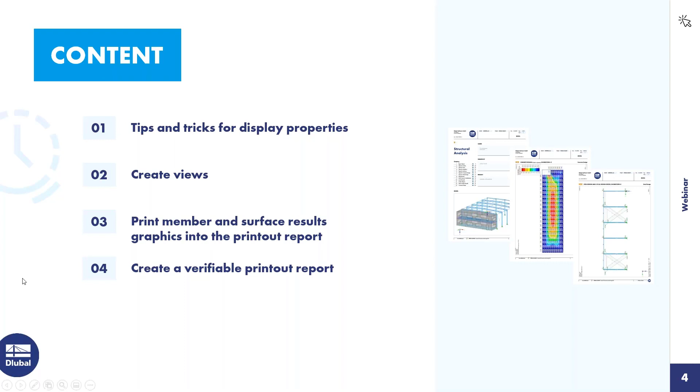Okay, then we turn to the program. That's the model of today's webinar. There are members of steel and surfaces of concrete. I designed the steel structure and that slab here. But before I start, I would like to introduce something - I would like to show you the loads.

So without results - the self-weight load case with the roof loads and the loads on the slabs, then the imposed load with the loads on the slab, and the snow load case. For the snow load, I use the snow load wizard.

I can display it by right click on the load, not separately. That's the load from the snow load wizard. If there are members below, then the program creates member loads automatically, and you can see that in that setting. The same is valid for the wind load case, wind in X direction.

I can display it also separately. Here are member loads and on this side, surface loads - so wind in X and wind in Y direction. I created only two wind load cases in this example.

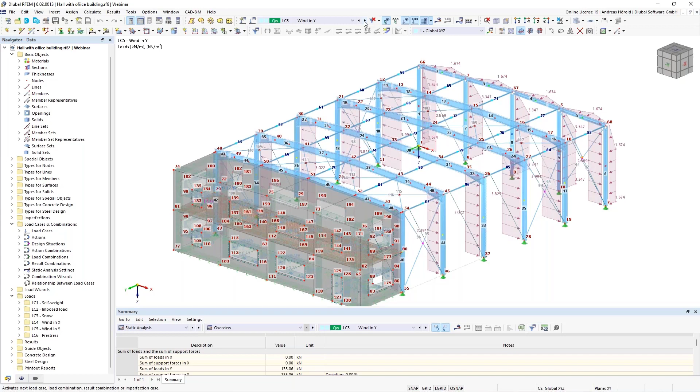And the last load case is the pre-stress. And we've got also imperfection cases, so in X direction and Y direction. Okay, that's all to the loads.

Then here on the left in the navigator data, I right click to open that dialog - load cases and combinations. I go through this dialog very quickly. In 2 weeks, I will present a webinar that contains the load cases and combinations dialog, only describing these dialogues.

I used for the combinations the Eurocode 0. Now you can see here different standards, international standards. And for the Eurocode, there are a lot of national annexes implemented. I use the German national annex.

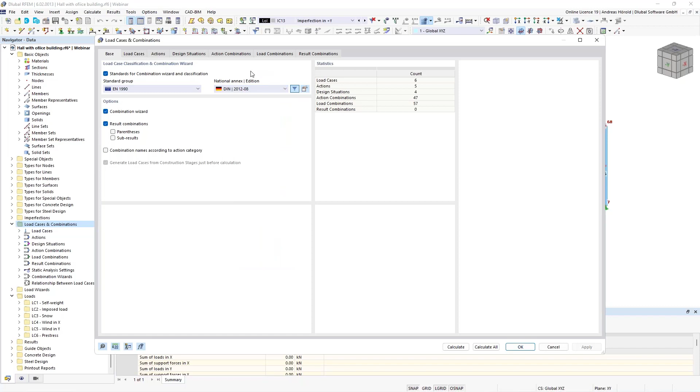Okay, then the load cases - the 6 load cases that I introduced at the beginning, the actions, for example the wind action - there are the two wind load cases assigned, and they act alternatively.

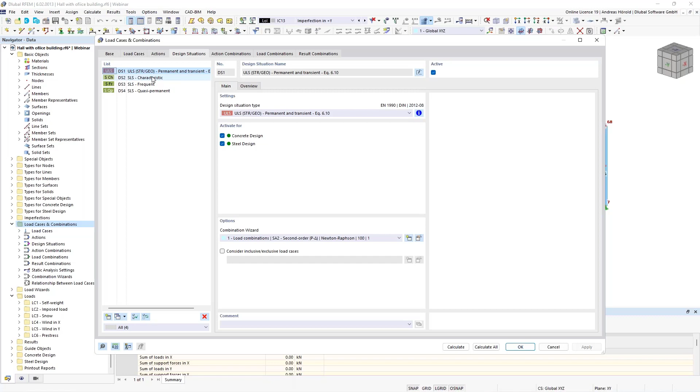So then the design situations - design situation number 1, it's used for the concrete design and steel design. It is for the ultimate limit state design.

Then design situation 2 for the serviceability limit state design, characteristic. It's activated for the concrete design and steel design, and these 2 design situations for the serviceability limit state design are activated only for concrete design.

So if you click on overview, you can see which load combinations are assigned. I can click through them. Okay, and here in this dialog, you can see all 57 load combinations.

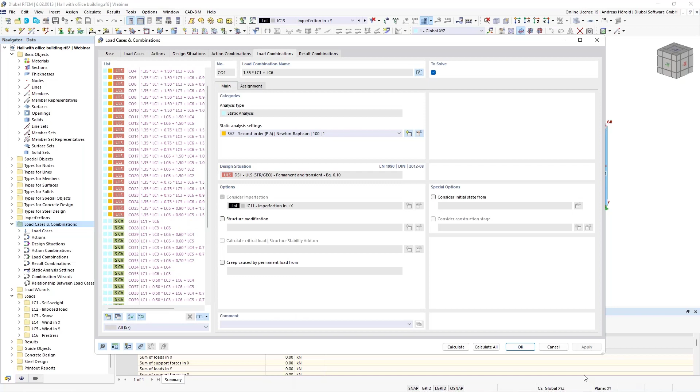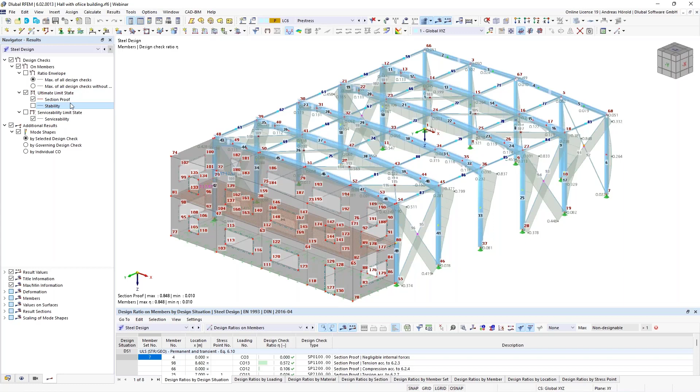Then I can click through these single designs here - the ultimate limit state section proof, stability, and serviceability limit state design.

Although they are displayed in different colors, you can see it's quite confusing. That's why we print not only the isometric view with the separate design checks. We create views in axis 1, axis 3, and axis A, with the multi-print feature.

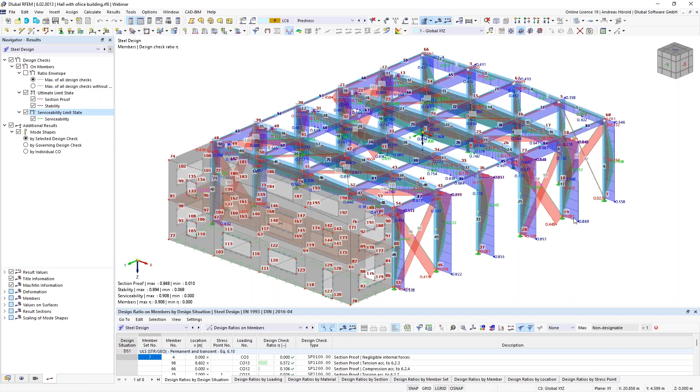Okay, I disable it. Then I show you the concrete design. I designed only this surface here, the slab. I can zoom in a little bit with the mouse wheel.

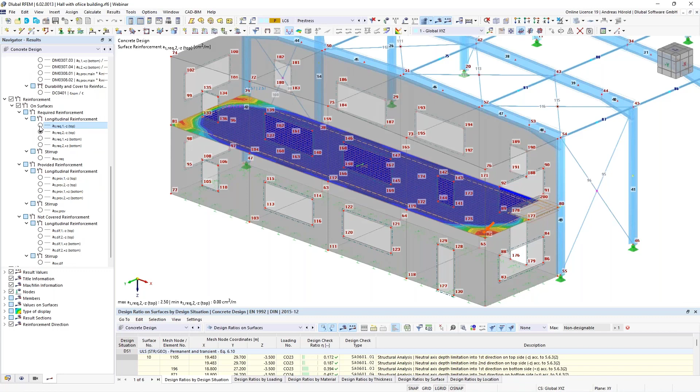So here in the navigator results, I can click through the required reinforcement, and I would like to print these four graphics in the printout report later with one step.

Then, parts list. We will also print a parts list in the printout report. I will come back to that later. That's a new feature in RFEM 6 and RSTAB 9.

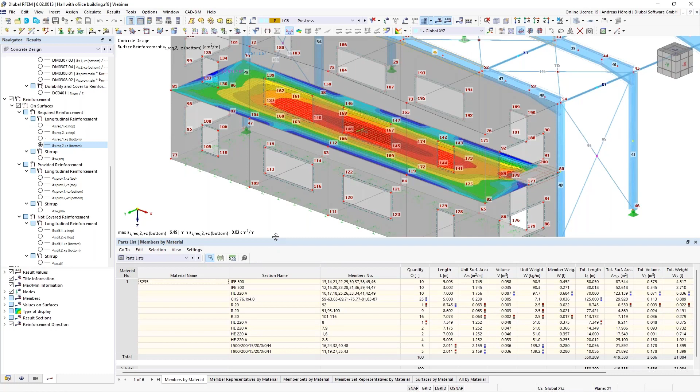So before we print anything, I define a line grid. Just a moment. Static analysis. So, line grid: left above in the menu, Insert, then Guide Objects, Line Grids.

Usually you define a line grid as a first step, not afterwards. I do it retroactively, and it's not a problem. You can do that anytime. I would add a label text.

Then here, line grid, I have to enter the distances in X direction, 4 times 5 meters. You can edit or change the labels here, but I'll leave it as it is for this webinar.

Then also 5 meters in Y direction, 5 times, and a short distance, that's the distance between the concrete and steel structure. That's all. I can apply it, and I'll see it in the preview.

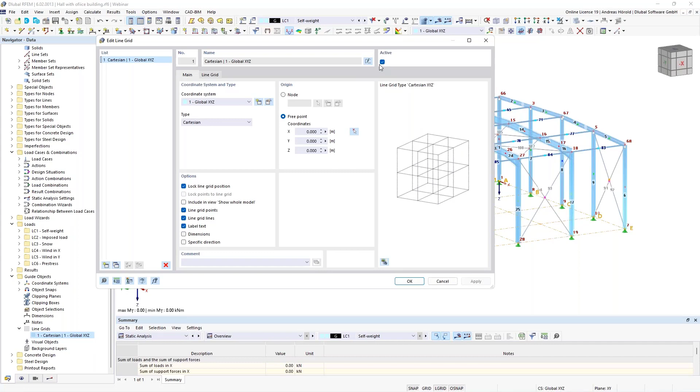If I would like to change anything in the display settings for the line grid, I can right click on it and open it. Just a moment, I load the white background.

So I can leave the dialog again. Right click, I show it again: Display Properties, and you get directly to the category here. A tip from my side: the categories in the display properties are similar to the categories in the navigator data and navigator display. If you want to find anything, you can right click on the object and find it here, and it's easier to find the object in the other navigators.

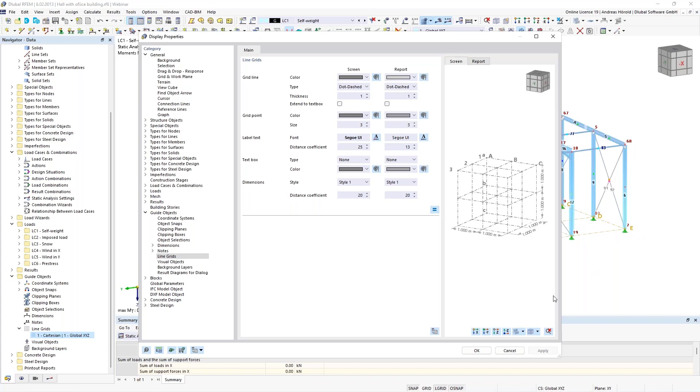Then I change the font to bold and size 12, and change the distance here. Just take a look at the text here. When I press Apply, it will be larger. So now the line grid is complete. I know where each axis is and can start with the views.

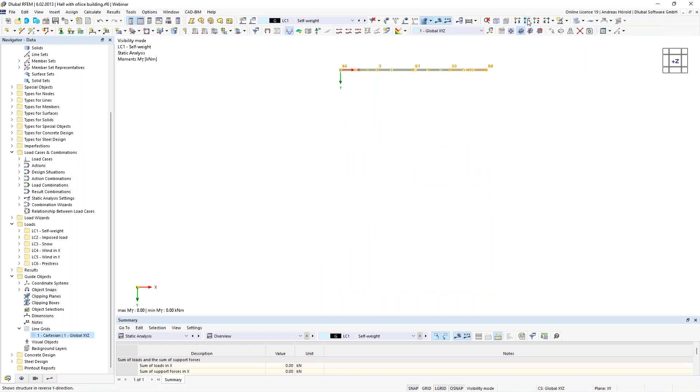Here, right above, I click on View in Z direction. Then I select all objects in axis 1, press Visibility by Selected and Related Objects, and change the view in -Y direction. Okay, and that's the view I would like to create.

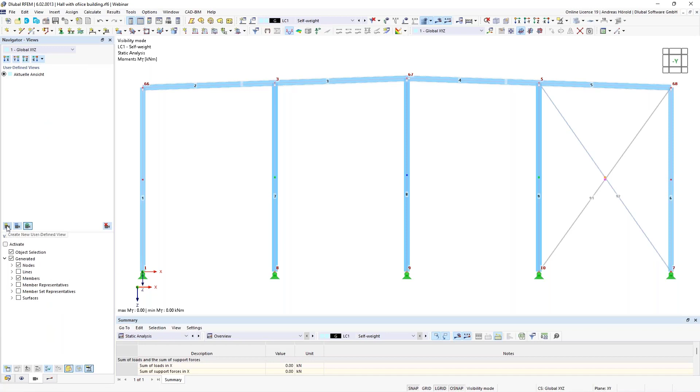So at the bottom on the left side, I change to the Navigator Views and create a new view with this button here. I call it axis 1. So that's the first view.

Right above, I click on Cancel Visibility Mode, change the view, select all objects in axis 3, then display only these objects, and change the view again. I can save the next view: axis 3.

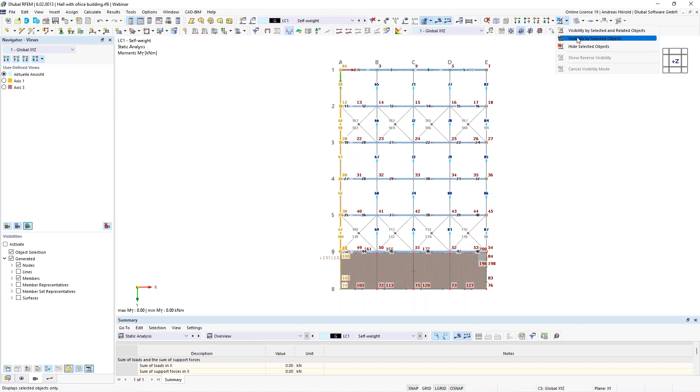Okay, then the same workflow again: all objects in axis A, then view in -X direction. I can zoom in a little bit. Now I can cut the concrete structure; it's not interesting for our results in the steel design. So, axis A.

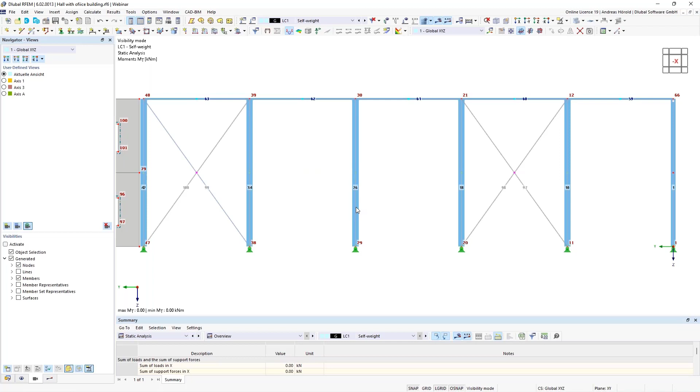So then I cancel the visibility mode again, and I select the concrete slab. Let display only this one. Change in Z direction. And I would like to create a view also for this slab.

As you see here, I created a surface reinforcement for the concrete design, a mesh Q257A. I would like to deactivate it, or not display it, so it doesn't disturb the displaying of the results. But I'm not sure where I can find it in the navigator display.

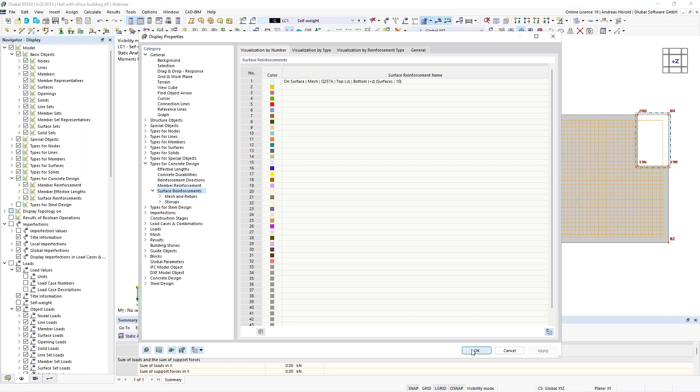That's why I apply the tip I gave you: right click, display properties. You can see in the category under types for concrete design, you can find the surface reinforcements. You could change the color here, but I don't want to change anything - I used it only to find the category for the navigator. Types for concrete design, surface reinforcement - I can deactivate it for the display.

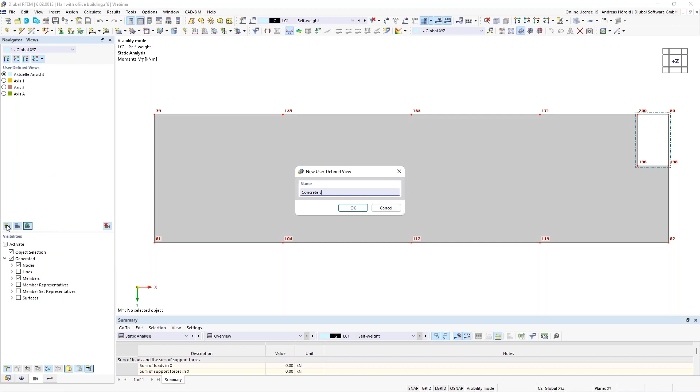Okay, then I create the next view - concrete slab. Now I recognize that the gray color here can maybe disturb the displaying of the results.

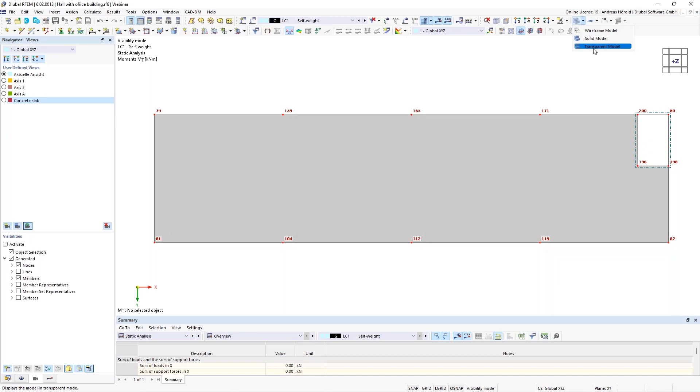I use the view transparent model and change to wireframe model. But now I have to update the view. How to do that? I unlock the views with this button here, then with the middle button I redefine according to current view. Then I lock all again, and then I can switch between different axes and see the view is updated.

So then all views are created. I cancel the visibility mode again and use the transparent model.

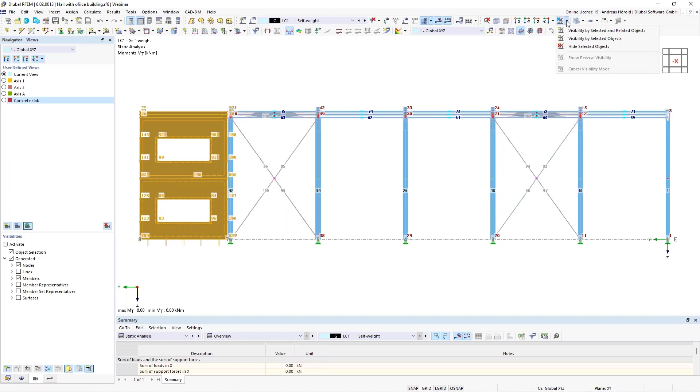For the isometric view that I want to print also in the printout report with the steel design graphics, the concrete structure maybe disturbs also the display. That's why I would like to deactivate it, or not display it. So I select all, and here right above I hide the selected objects.

Now it's not visible. Maybe we can display it but hidden. How to do that? I change to the navigator display, scroll a little bit down, and under the general settings you can show hidden objects in background. Okay, I like that more.

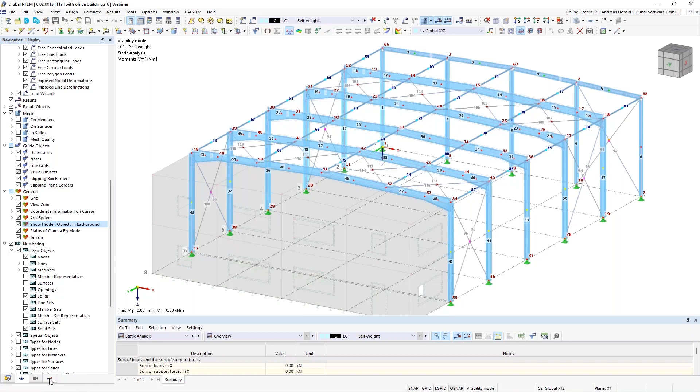So then in the next step we can print the steel results, so I can display them again. Okay, maybe I can rotate it a little bit.

I would like to print that view and the other views. So left above here, you can open that drop-down menu and select Print Graphics to Printout Report.

So then you can see a preview here. You can rotate the graphic - that would be 0. And if you want to rotate it in a clockwise direction, then for example 90 degrees, then you need to select this.

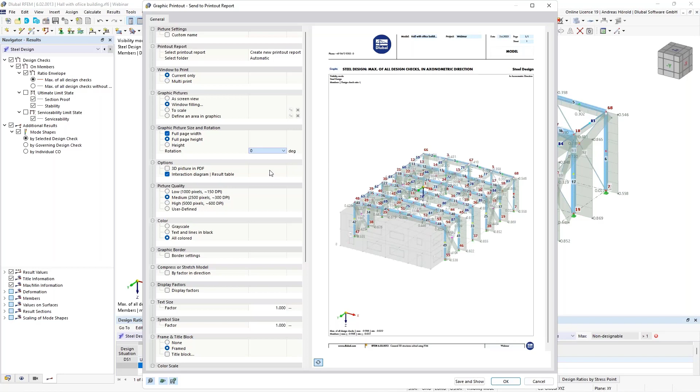But I would like to rotate it 90 degrees anti-clockwise, that's why I use 270. So you can use a screen view or window filling - it doesn't matter. And if you want to print only this graphic in the printout report, then press OK or save and show.

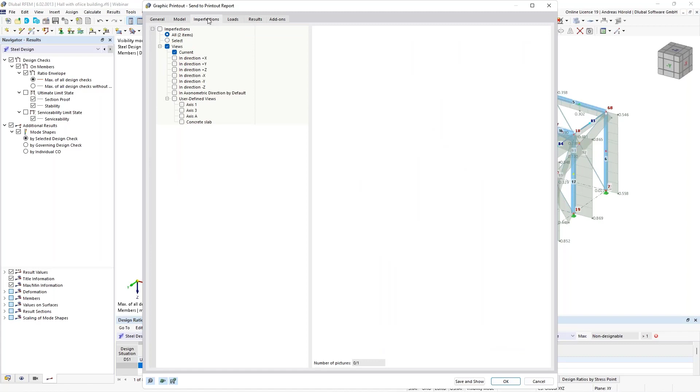That's quite easy, but I would like to use the multi-print feature. So I go through the single dialogues. I don't want to print the model, no imperfections, no loads, no results.

It's of course possible to print the member results, for example the internal forces, but I would like to print only the steel design results in this webinar. So the current view, that was the isometric view, then the saved axis. Then on the right side, I select the maximum of all design checks: the ultimate limit state, section proof, stability, and the serviceability limit state design.

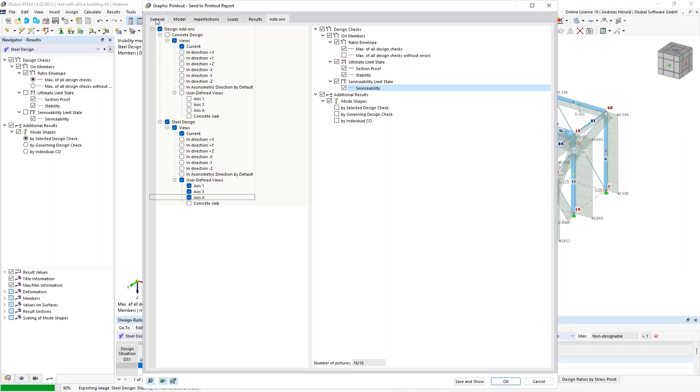At the bottom, you can see there are 16 pictures that are created in few seconds. I switch back to the general dialog, and all images are created. So that's the isometric view with the 4 design checks, then axis 1 with the 4 design checks.

Then axis 1 with the 4 design checks. You can see in the preview, it's quite good readable in the views. So this is axis 3, etc. Then I press save and show.

And we turn to the next dialog, printout report manager. Since we open the printout report for the first time, we have to select what we want to document. At the bottom left, you can load from a template - there are different templates already available, for example the input data and reduced results, that's the default setting, then concrete design, steel design, etc.

So I use the default setting. Of course you can save a template with this button here, save as template.

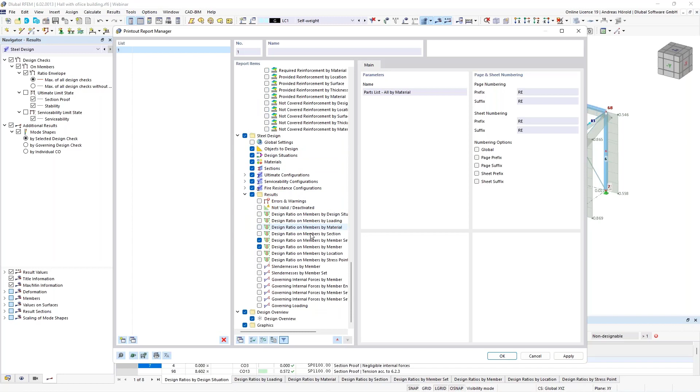Then parts list. Yeah, I select only this one and this one to show it later in the printout report. So then, for example, concrete design, where are the tables with the design ratio on surfaces selected, then the required reinforcement. For the steel design, the design ratio on members by member set and by members. Okay.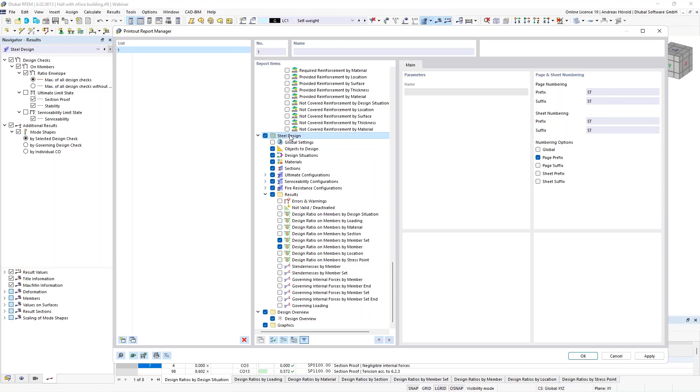So on the right side, you can select here, for example, page prefix, then prefixes will be added, for example, for the steel design, ST, or for the concrete design, CO, or for the model, MO. So, okay. Then the printout report is creating. So at the first time, it takes some seconds.

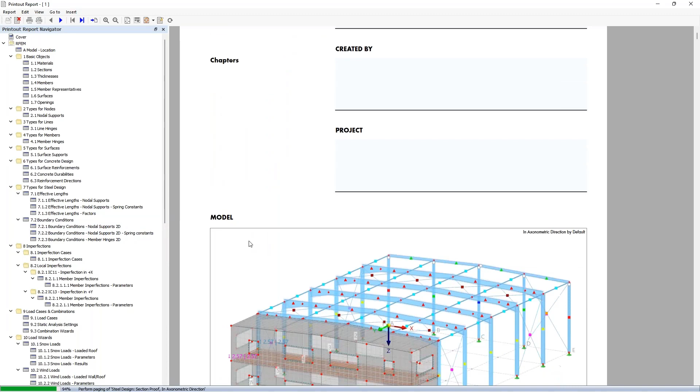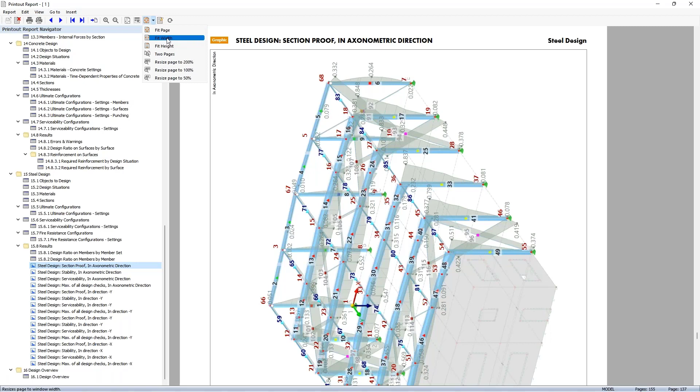Okay, that's the printout report. On the left side, you can see the content. And what's interesting to us in the first step are the graphics here. Above, you can switch between different displays, for example, fit page, fit width, fit height, and so on. 2 pages. I fit the pages. Okay, so the 4 graphics for the isometric view.

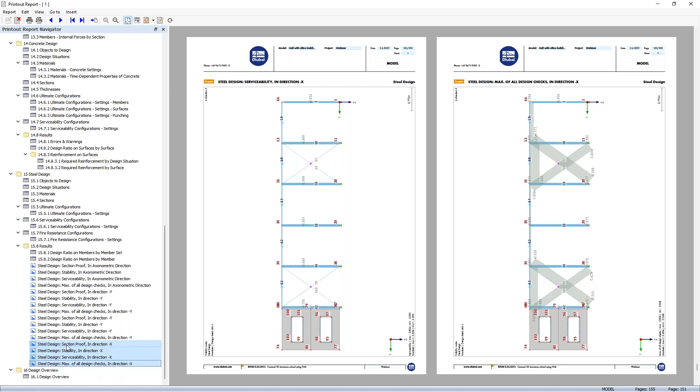So then axis 1, axis 3, and axis A. As you can see, the last 4 graphics are with the concrete structure, and yeah, I can modify that. With the Shift key, I can select all 4 graphics here on the left side. Then I do a right click, go to Properties, and select not window filling, but as screen view. And all 4 graphics will be updated in the next seconds.

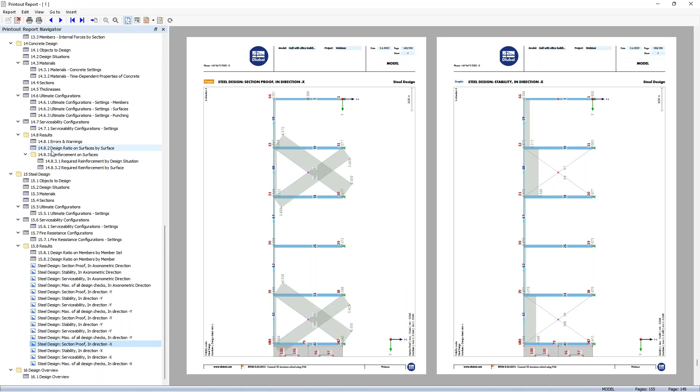So let's take a look. Okay, now the concrete structure is cut again. So then I would like to show the parts list. I fit the width. Parts list. Yeah, you can see in this table here the section name, then the length, the total length, and the sum of the length, then the total surface area. Yeah, for example, to calculate the coating or galvanizing, the total volume and the total weight. And you can also document the total weight by material here, steel and concrete.

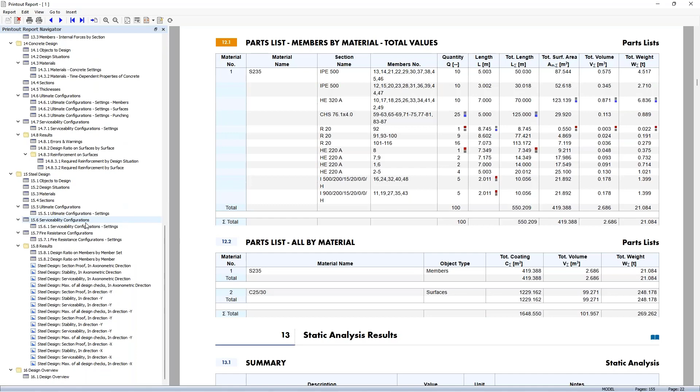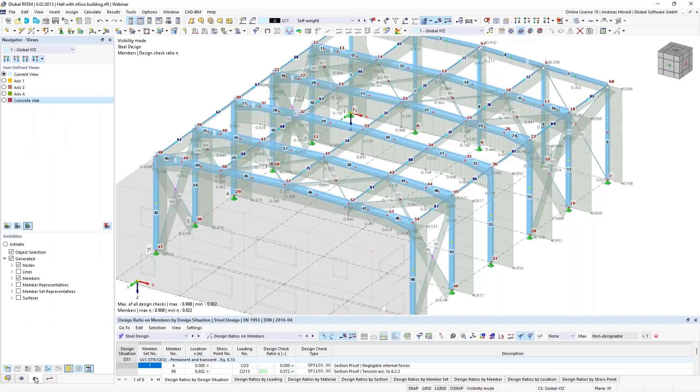Okay, then I moved the printout report a little bit on the other screen, and as you can see, I can work in the program and in the printout report in parallel. So I move it completely to my other screen. I would like to show you another feature. I select axis 3, and I would like to print the result diagram of this member set here, the horizontal beam. That's member set 3, and I would like to print it in the printout report.

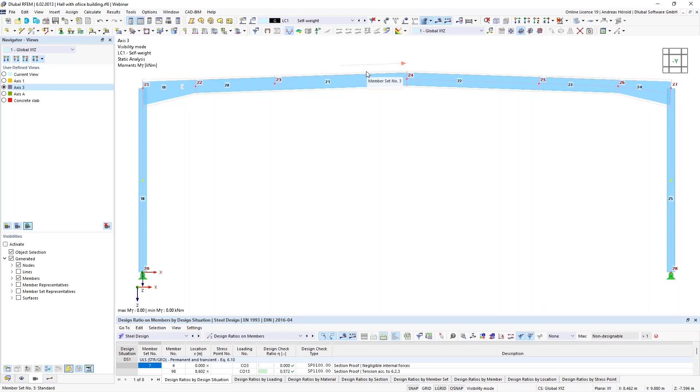Right click on the member set, then result diagrams. So then I have to select here, results on member set. That's okay, but not the self-weight load case, but the ultimate limit state design as design situation number 1, member set 3. Okay, I would like to document not the global deformations, but all internal forces. N, V, M. Okay, so 6 diagrams are displayed, and with that button above, or with the drop-down menu, print graphics to printout report, I can print that graphics.

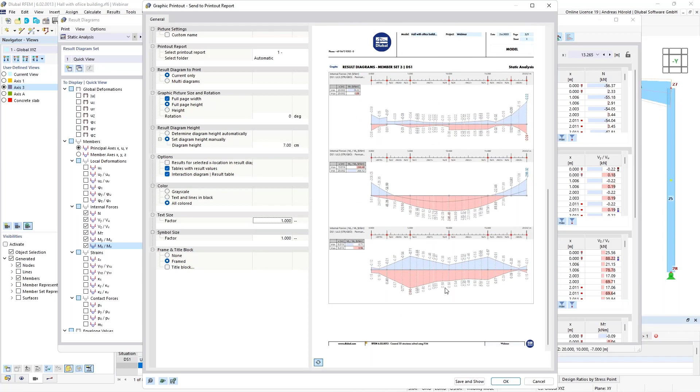So all graphics on one sheet at the moment. I can press here on the left side, determine diagram height automatically. And now it's much better. And you can also set the diagram height manually. I tested it before. 7 centimeters is also a good parameter. Okay, then save and show. You can leave the dialog, and we can take a look in the printout report.

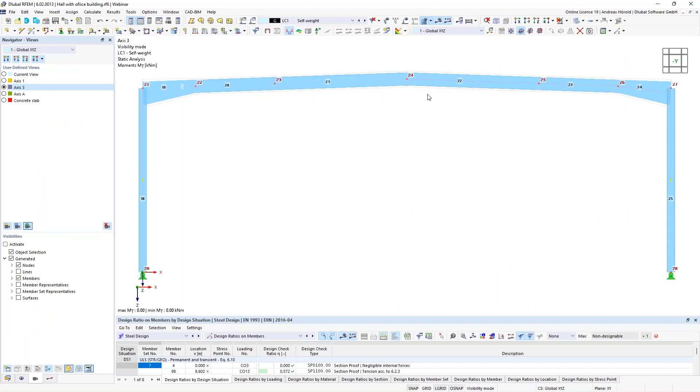Here is the result diagram. I fit the page, and you can see the 2 pages here. Okay, that's all for the steel design documentation. I continue with the concrete design. So that's why I go back to the program. So I use the view concrete slab. Let's display the concrete design results. Okay, then I change here left above to the navigator results.

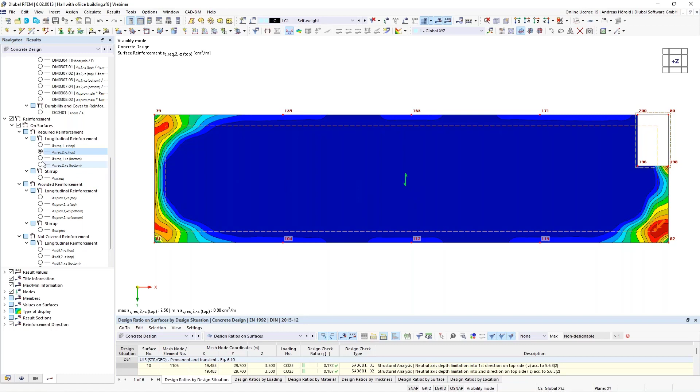And we can click through the single results, the two directions of the reinforcement on the top and at the bottom. You can see the direction of the reinforcement with that arrow here. Okay, and I would like to display the values as well. If you want to delete one decimal place, then you can go here left above to edit, then unit and decimal places.

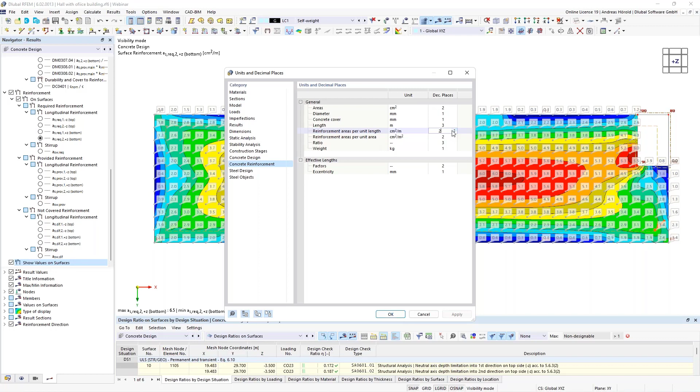And under concrete reinforcement, you can find the setting here, reinforcement areas per unit length. So, and if I change that and press apply, you can see in the preview there's only one decimal place now. Okay. I leave it as it is. Yeah, let's try it. Okay, then I print all again.

In the first step, I select the current view. Yeah, that's quite okay. The rotation is okay as well. Window filling, okay. And I select the multi-print. I would like to print all 4 graphics.

So, concrete design, the current view, and the 4 results for the required reinforcement. And I select also show values on surfaces. Here, 4 pictures will be created.

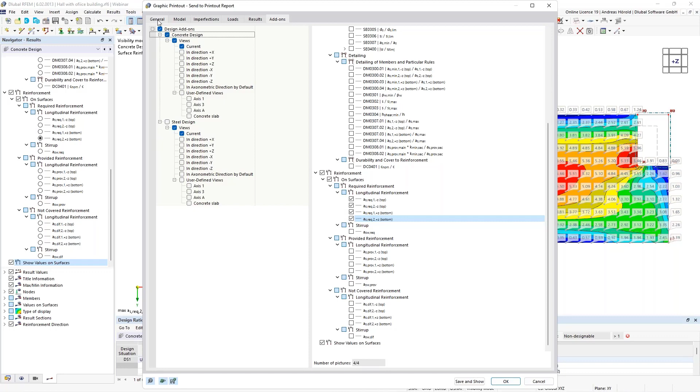We can scroll through the 4 images. Yeah, it looks quite good. Then we can press save and show and go back to the printout report. So, take some seconds. All is updating.

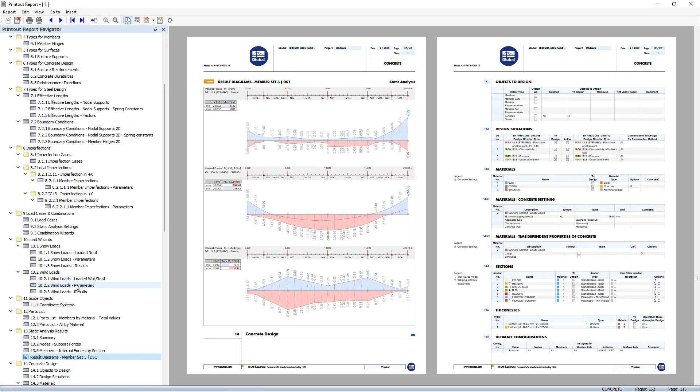So, now the 4 graphics are printed in the printout report. Yeah, I think that's quite easy. Just test it. And that's all for the steel and concrete design documentation. I will continue with general features of the printout report.

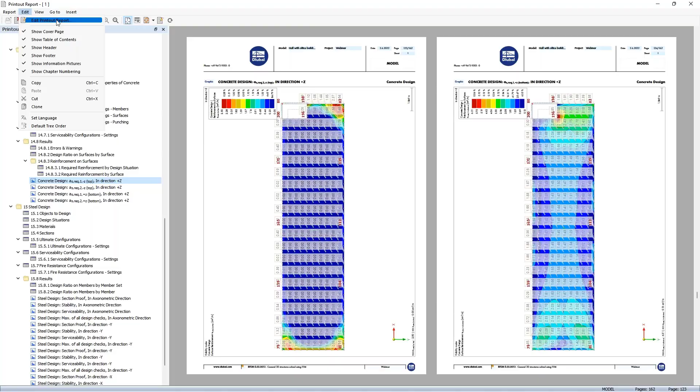So let's click through the menu. Here left above, the report. Yeah, close report, it's clear, and so on, delete. And at the end, we will export the finished printout report to a PDF. So edit, you can edit the printout report. It's the same button as here. You can add more topics if you want.

So I go back to the printout report here. So then you can use the copy, cut, and clone function. Shortcuts, Control and C are available, and so on. So you can set a language. You can translate the full printout report in another language.

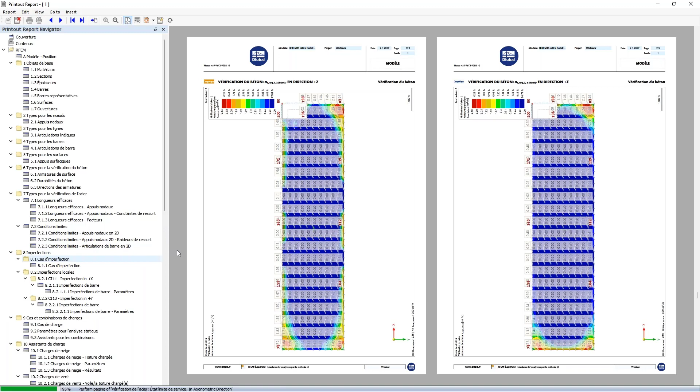I select French. There are 11 languages available in RFEM 6 and RSTAB 9, and it takes only a few seconds to translate such a printout report. Now we have got more than 150 pages, and you can see that it is already translated here. All is in French now.

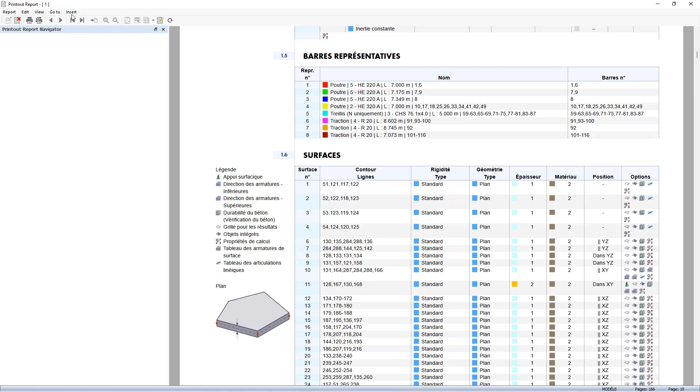I change it back to English. Okay. Then we have to wait some seconds. Go to, yeah, where are these buttons? You can switch between the different pages. You can open here, go to. I would use these buttons here, come to the end, to the beginning, to the next page, and so on.

And you can also click through the menu here, or the content, or navigator. So then insert, you can insert different things, images from file, an image from clipboard, then a plain text, rich text, HTML, then formulas, PDF. And I would like to insert a plain text and a PDF. The workflow is similar for all. So I start with a plain text.

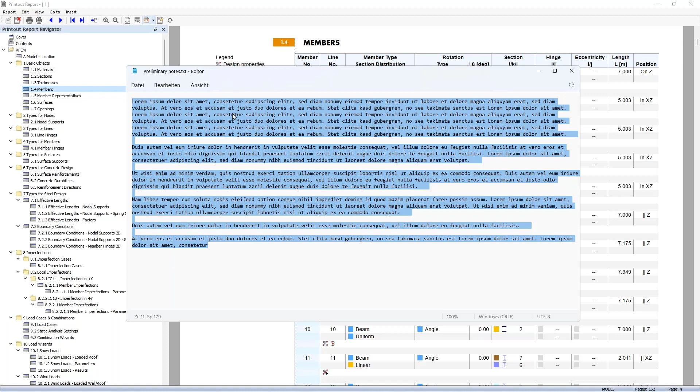For example, you have to add the preliminary notes. You can do it this way. I prepared a dummy text, and with Control C, I can copy that, and Control V, I can insert it here. Okay. It will be added at the end of the printout report.

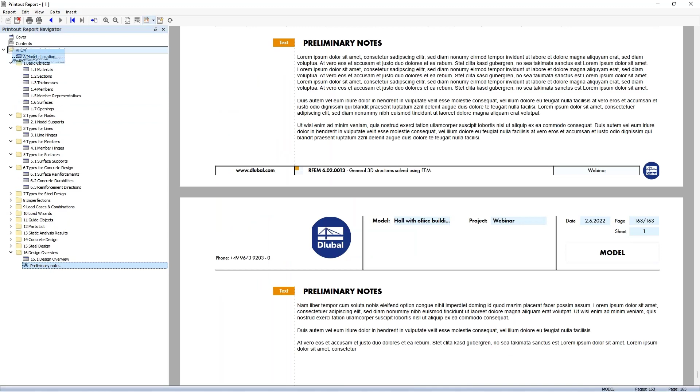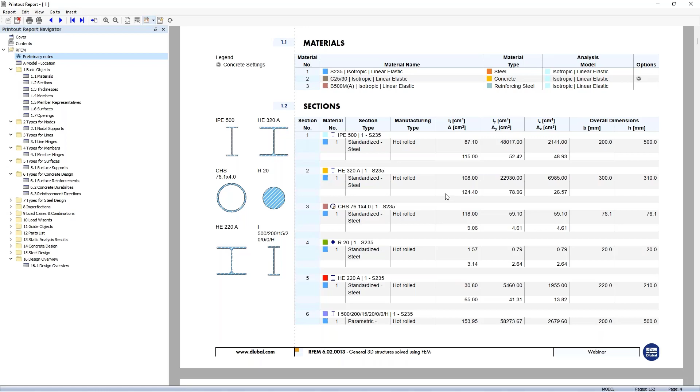I close here some folders so that you can see that I can drag and drop it here at the beginning. Okay, now there are the preliminary notes, model location, and so on. Those are mini pictures. They support the tables, I think. Here the single sections, for example, the internal forces on the members, etc.

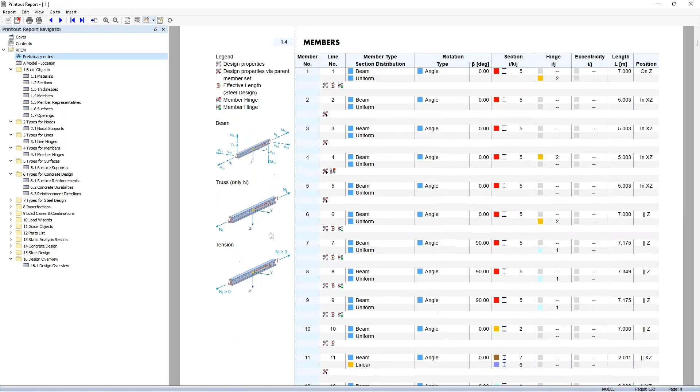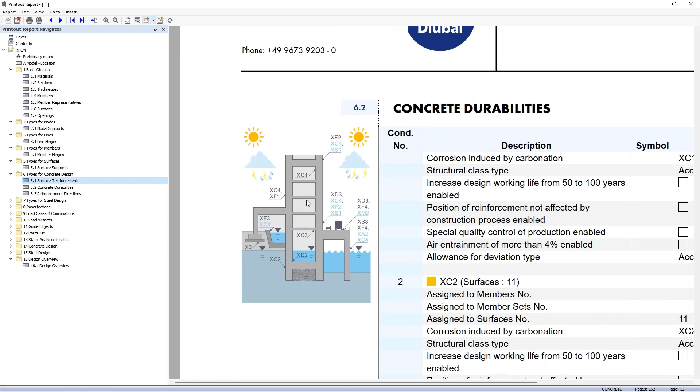Or for example, for the concrete design, this graphic here, I can zoom a little bit in. For example, with the dimensions here, the diameter of the reinforcement, etc. Or this graphic here for the concrete durabilities, we used XC1 and XC2, and it's such a supporting mini picture.

So in the next step, I would like to insert a PDF. That's why I go to our website. So I switch to dlubal.com and English. And under solutions, you can find the snow load, wind speed, and seismic load maps. Okay, took a long time, I don't know why.

There are different international standards available, and for the Eurocode 1, the different national annexes. You can see at the moment the United Kingdom. I enter a location, the location of our subsidiary in Leipzig, Germany. That's what I used for my design.

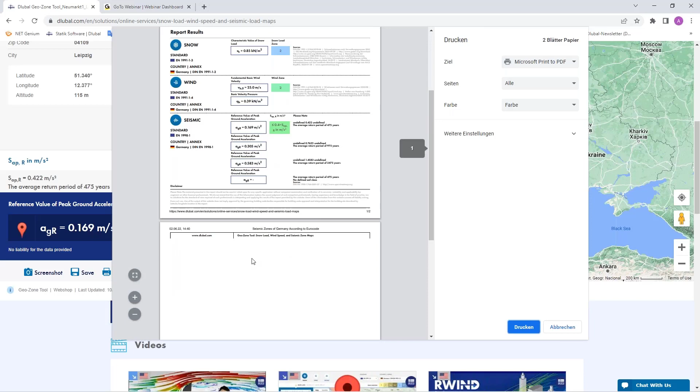And you can see the characteristic snow load here, the wind parameters, and the seismic parameters. And with that button here, you can print it in a PDF, for example, or directly. So yeah, only page 1 is interesting to us, and you can see the map, the address, and the results from the load maps. Okay, I print only page 1, or yeah, I print all.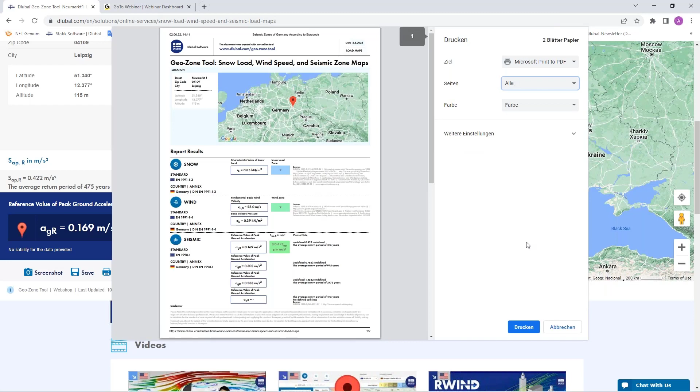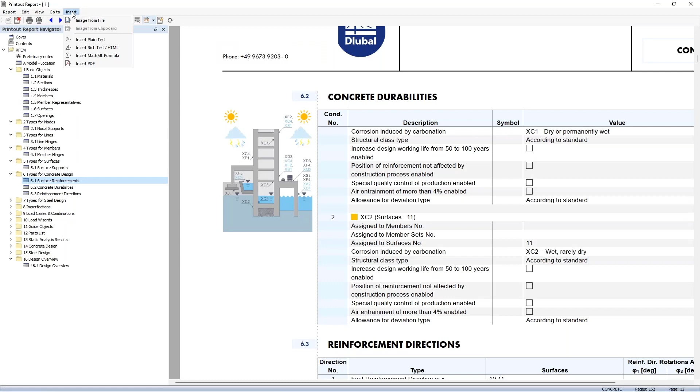Yeah, it's in German. My Windows is in German, sorry. Okay, and I print it on the desktop, load maps. Okay, then I go back to the printout report, press insert, insert PDF, then desktop, load maps.

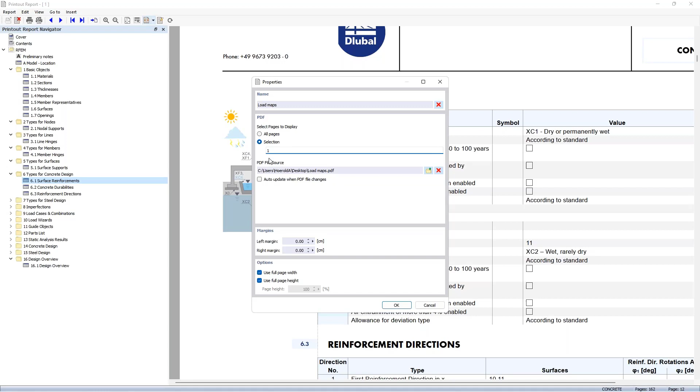Okay, that's the preview, 2 pages open, and I can take over only 1 page, for example. I use only the first page. Okay, and that's why only 1 page has been inserted. Okay, I move it before the wind load wizards. So, okay, the load maps with the values and then the load wizards for snow and for wind. Also here the mini graphics.

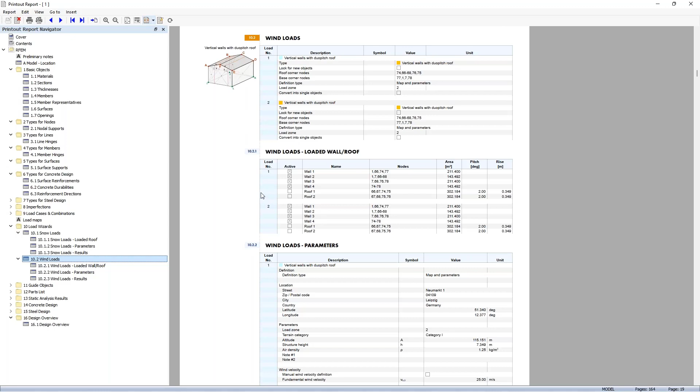Okay, then in the next step, we come to the cover. With a right click on the cover, I can press here, edit. Yeah, let's go through the single dialogues here. Printer settings, yeah, I think it's clear. Page setup with the paper format. You can also select another format. Then, yeah, the margins, etc. Then other settings. You can enter the address of your company here.

I enter Dlubal Software GmbH. Then our address of our company, Am Zellweg 2 in Germany, Tiefenbach. Okay, and I can save it as a template. I call it Dlubal. Okay, as you can see, there are 3 templates already available, and I save Dlubal for my next printout reports.

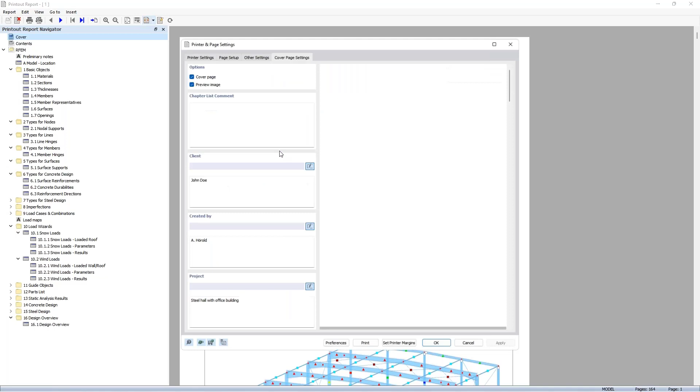Okay, then cover page settings. You can enter, for example, the client here. I call him John Doe, created by me. Yeah, only that we have some text in the single tables, and I call it Steel Hall with office building. Okay, that's all. The cover is finished. And you can, of course, also change the logo here. Go to edit again. Here, the logo path, you can change it, of course.

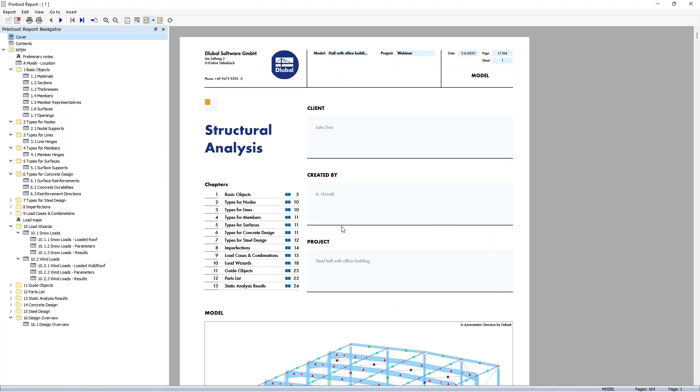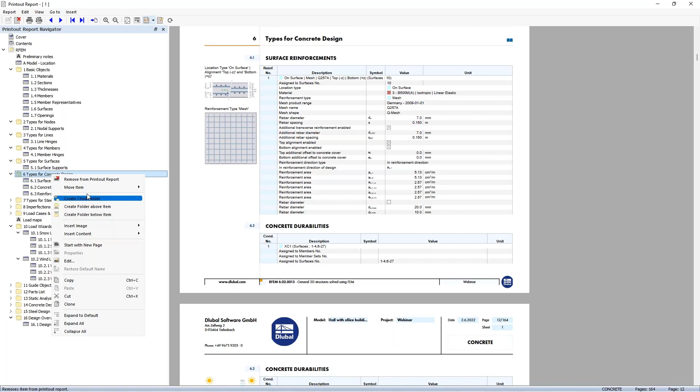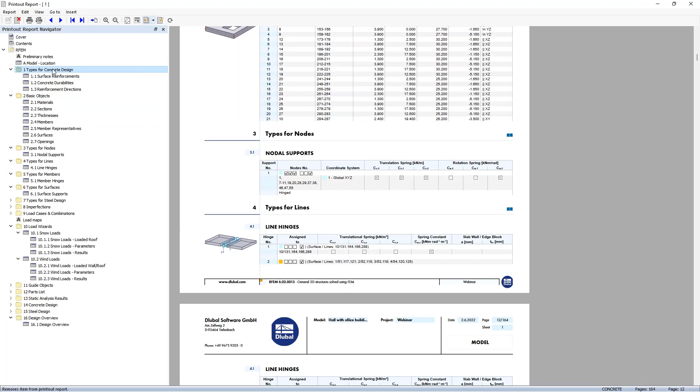So the next step, what I would like to show you, the folders. You can move such folders here. For example, types for concrete design. If you do a right click, you can move the item to top, or yeah, move the item down. Okay, it was on the 6th place, as I remember right. You can do, of course, also drag and drop.

So, and you can create a folder, a child folder, or a folder above the item. I call it test to show it. Yeah, you can add to this folder, for example, graphics from the printout report or PDFs or something like that. Okay, I delete it. Okay, the printout report is complete for this example. I can go to report, export to PDF, and I call it PR, printout report, save.

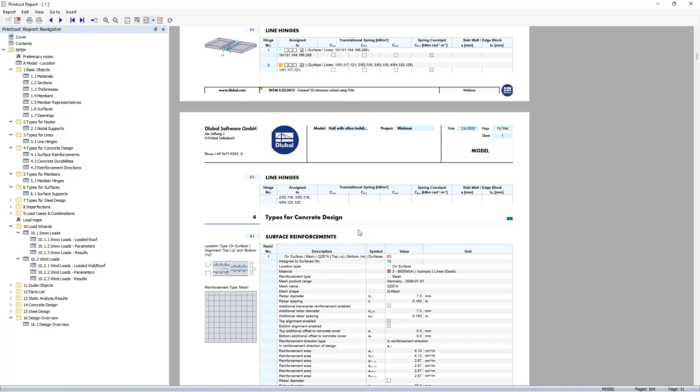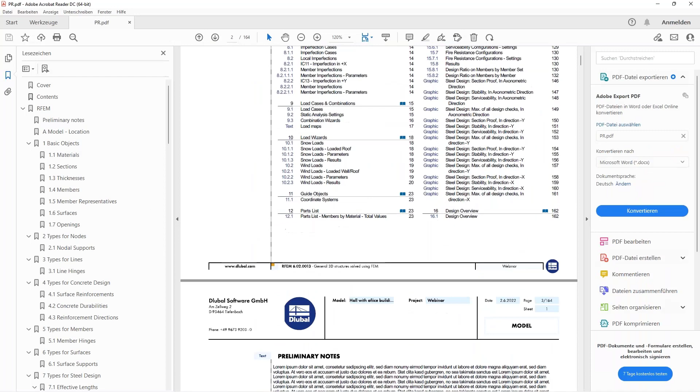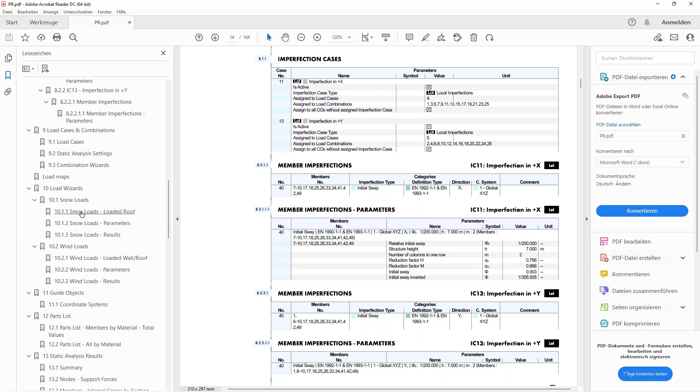Okay. In the next seconds, it will be finished. So it's on my other screen. So that's the PDF of the printout report. And what I like are the bookmarks on the left. You can switch between the single folders and so on. Yeah. Also a quite good feature.